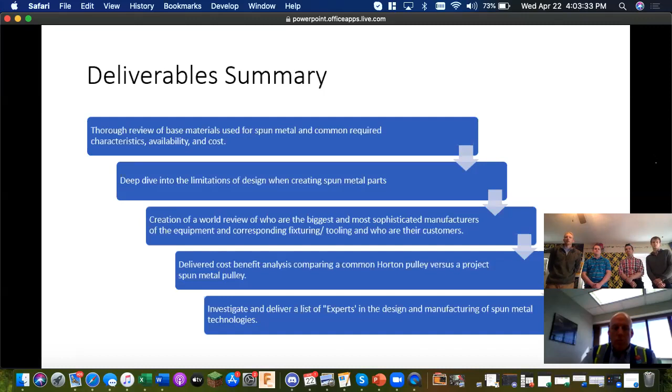Okay, and an introduction to Horton. Horton Incorporated is an American company. They're a major truck OEM. OEMs are original equipment manufacturers, so they create components which other companies can purchase to put into larger systems and then into their own practices. Some of their on and off highway customers include John Deere, Daimler, Volvo Mack, Peterbilt, Caterpillar, and Komatsu - big, large trucking industries.

All right, so now we'll take a look into how this is incorporated into Horton, what products they manufacture, how this project ties into that, and some of the work that Horton has done in the past. So the parts that Horton makes that go on these OEM trucks and agricultural equipment are the fan systems, the clutch drive systems, and pulley systems that go on the front of the engines to help in the cooling of this large equipment.

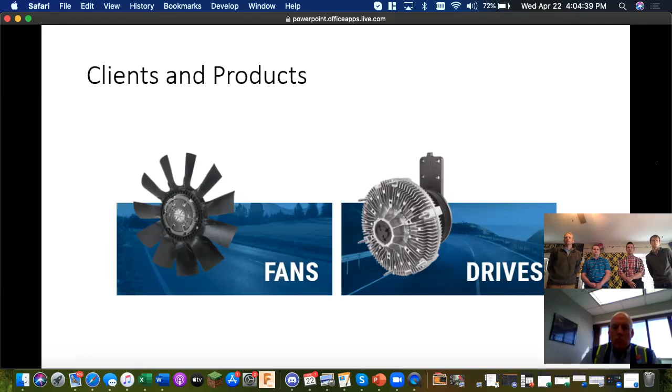Now the cooling system is made up of a variety of different components. You have radiators, you have fans, you have all the coolant, there's water pumps, heat exchangers, all the stuff that goes in for keeping the engines in proper operating temperatures.

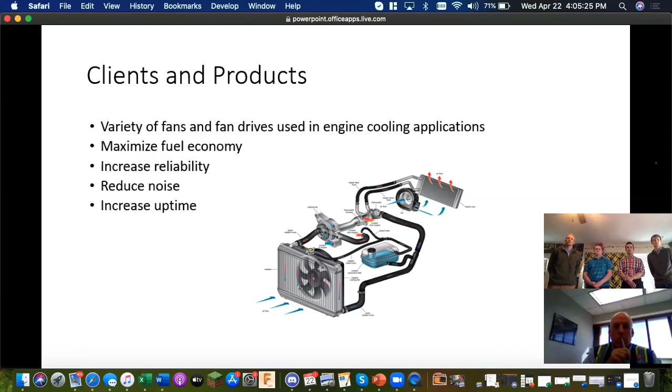Now these components are all driven off of a belt drive that goes on the front of the engine. The cooling system turns on and off with the clutch drive so that the engine can stay at proper operating temperatures, so you can achieve proper fuel economy. This is all done to increase the reliability of the equipment and the tooling.

Now, that pulley is one of several pieces that go on the front drive end of an engine. Some go to the water pump, some go to cooling fans, some go to alternators and other pieces for the equipment.

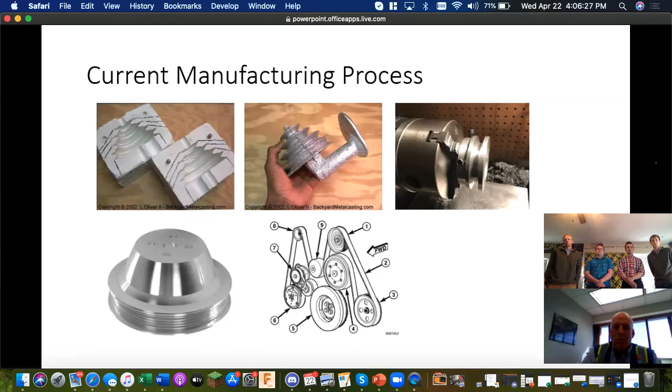The proposed process that we'll be looking at is the spun metal process. This differs from a cast process in that all your material comes in sheets or coils. These coils are unrolled and then stamped, or potentially laser cut or sheared, into circular blanks. These circular blanks are then spun or drawn over a mandrel or buck into the desired shape.

The process can also take on annealing steps that help soften and take some of the strain out of the part prior to final rotational forming, which puts things like the grooves in for the serpentine belt that drives all the fans. Finally, you can have heat treating processes which help achieve desirable hardnesses.

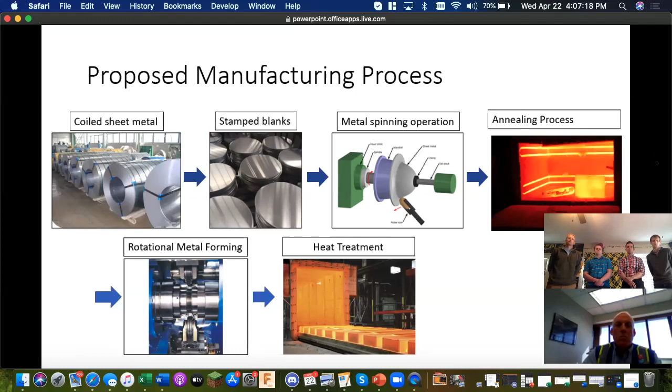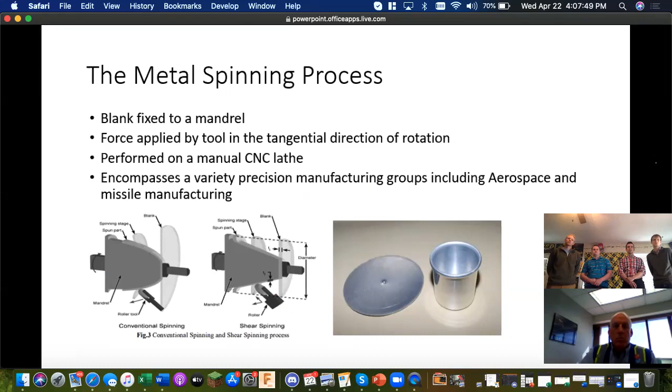The metal spinning process is fixtured on a buck or a mandrel, in the shape of the part that you'd like to achieve. On this mandrel, you put a circular disc of your material, and that is spun and forced over it with a CNC or by an operator, using rollers or shoes to push the material into shape, slowly forming it into the final product.

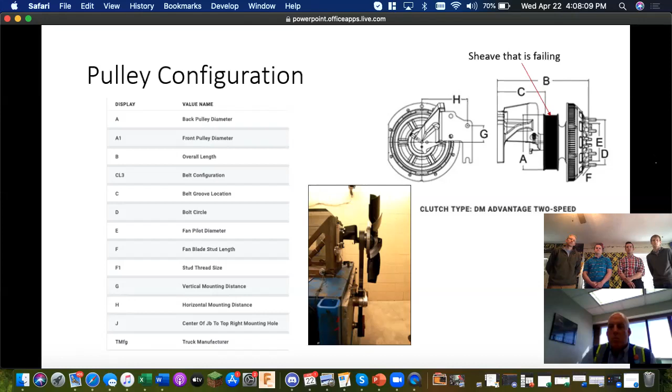In the past, Horton has done several CAD designs and different modeling to try to predict where failures and stresses would appear in their final product.

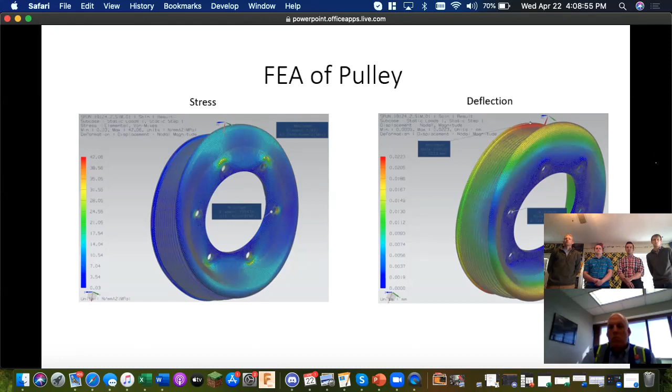You can see the very outer lip of the pulley, furthest away from the mounting surface, has the maximum deformation, and that's caused by all the force of the front drive system.

This is a video that Horton has taken in the past for one of the processes when they're making prototype spun metal parts.

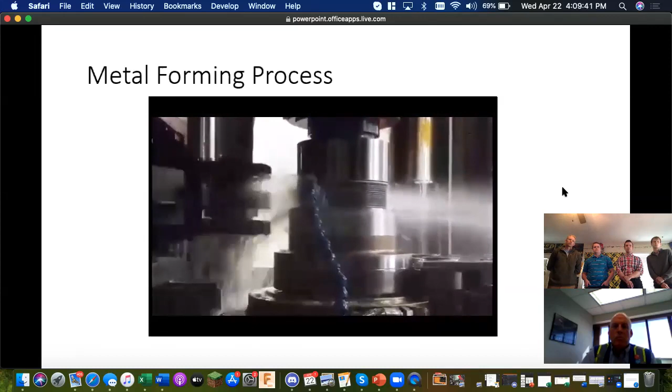Through testing they saw complete failure of these parts between 80,000 miles and 170,000 miles, which may sound like a lot, but in general it's pretty low for the amount of miles that some of this equipment may see, which may be up to millions of miles of road use.

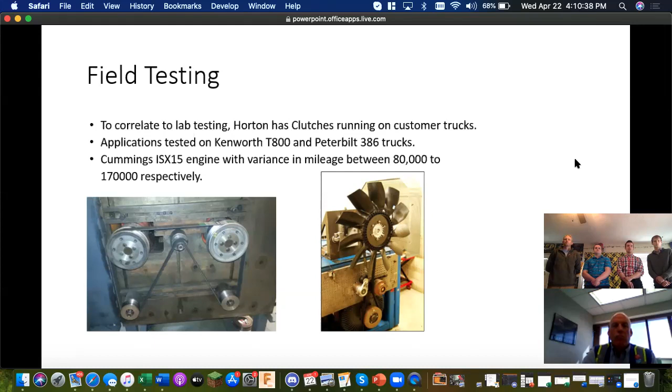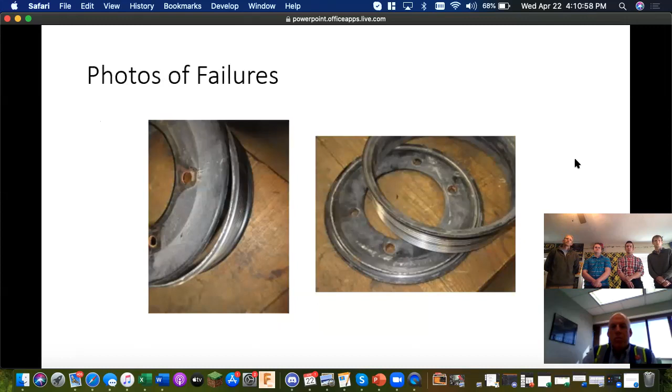Here is a final photo showing where that failure point occurred. We can see that it was on that bent lip where our highest stress concentrations showed up in the FEA design. So it's good to see that our modeling and final results have correlations, but it's bad to see that our part is actually failing prematurely.

Next we're going to do a deep dive into Deliverable 1, which is a review of the materials. On the next 3 slides we have some technical information about 3 common types of steel that we think would work very well for Horton's application, both in the pulley and in the spun metal process.

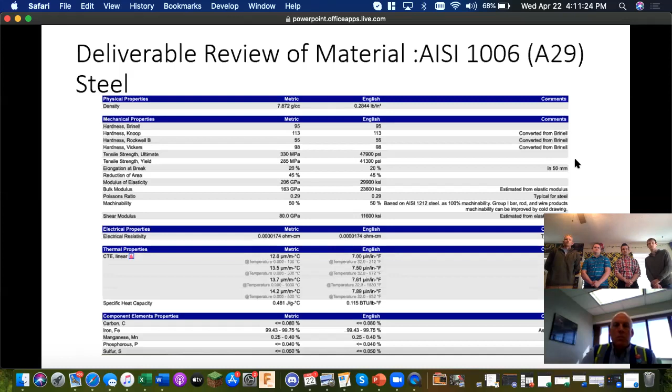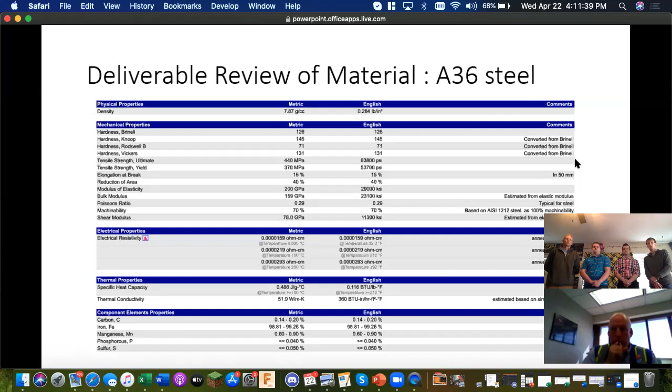Some other information about materials: stainless steel is also a viable option for metal spinning, but it is 4 times the price. We don't think the benefits of stainless steel will negate the 4 times price increase in the material. If you are going to use stainless steel though, 3000 series is the best for metal spinning.

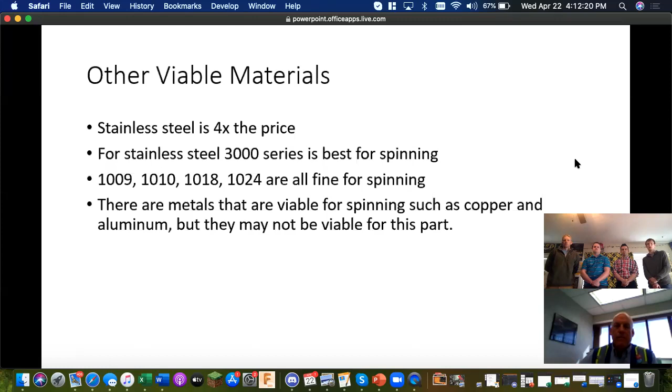Some other types of regular steel that will work great for spinning are 1009, 1010, 1018, and 1024. There are other possible options for metal spinning, such as copper and aluminum, but these metals will not be strong enough to withstand the stresses put on the pulley.

There are other shape guidelines that will be put in the report. These are just the 3 that are most applicable to the pulley itself.

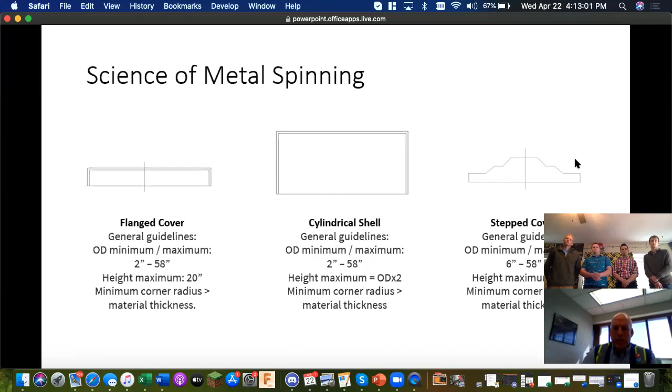Some other information about metal spinning: the maximum size of sheet that can be spun is 92-inch diameter, because that's the biggest sheet that can be ordered without welding. You never want to spin a welded part. Metal spinning is a very safe manufacturing process, but if you start spinning welded parts, that's where you can run into dangerous situations.

As a guideline for strength, the material should only be stretched as deep as it is round. Too much draw depth can severely weaken the final product. Aluminum can be stretched basically as far as you want without problems, as long as it stays above a minimum thickness. For steel, the thickest ACME has ever spun is 1 1/4 inches, but they believe they can do up to 1.5 inches without a whole lot of problems.

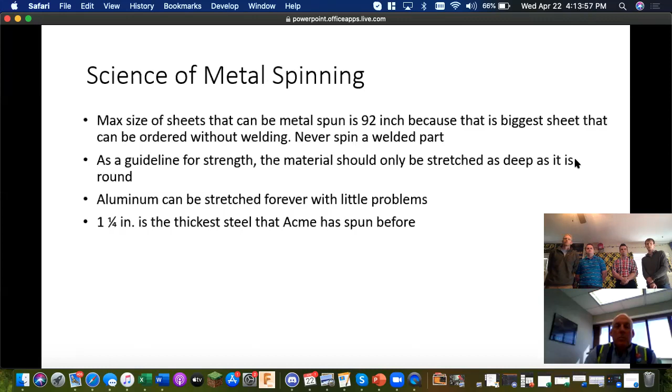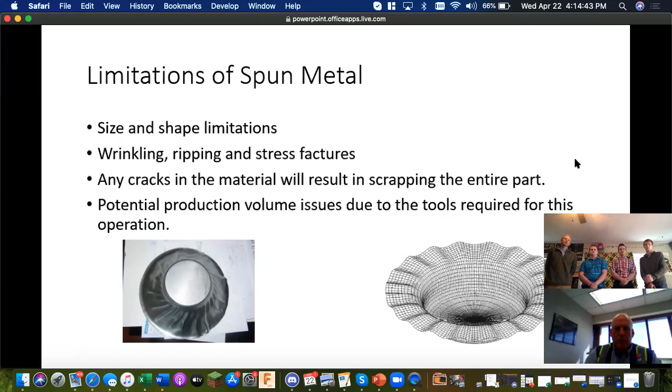So some limitations of spun metal: we had some shape limitations from a few slides ago. Besides that, during the metal spinning process, if the material gets too thin or if you use the rollers too fast, you can have serious issues such as wrinkling, ripping, and stress fractures. Any of these failures will cause an instant scrap of the part. It's impossible to save a part that has any cracking in it without melting it down and starting from scratch. So you can have potential production volume issues, balancing going in too fast compared to getting parts that'll work strength-wise.

For quoting metal spinning, companies will quote a design based on perimeter and a draw depth of the piece provided. As a general guideline, the equation for the sheave we were presented is diameter times 1.5 times the draw depth. The blank cost is calculated based on the weight of the piece. It's impossible to get an actual price because metal prices fluctuate so much, so it's just based on the estimate at the time you want to make the part.

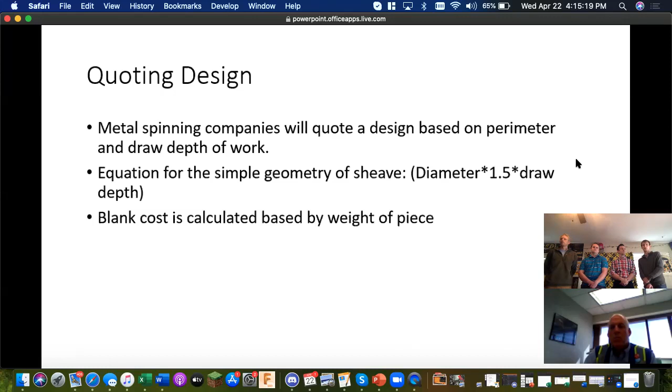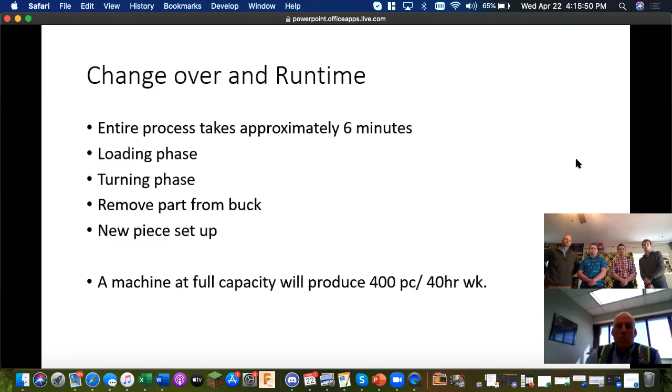For the changeover and runtime in setting up the process, the entire process will take about 6 minutes for this specific part. That includes the loading phase, the turning phase, removing the part from the buck, and new piece setup. A machine at full capacity will produce about 400 parts per 40-hour work week. That can be adjusted, but this is set at a pace we think will have minimal problems with wrinkling and stress fractures.

Another process previously mentioned is annealing and heat treating. The benefits of annealing are that it softens the metal for cold working and prevents hardening and stress fractures, which improves machinability. It also enhances electrical conductivity, but in our case it seems very important due to the stress fracture breaks the first time Horton tried to make a spun metal pulley.

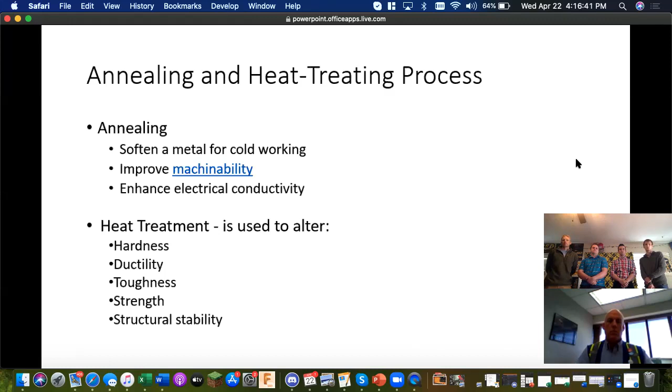So we would highly recommend annealing during the process. When the whole process is over, you can heat treat it to increase the hardness, lower the ductility, increase the toughness and strength, which will overall just increase the structural stability and longevity of the part.

So pass it on to Cory. During our time doing research for this project, we decided to tour ACME metal spinning to get a view of what these machine shops actually look like.

So this slide, we're going to talk about what we observed while we were doing research at ACME. Right when we got in there, we went onto the floor and got to take a look at their entire process. They had multiple machines running, and we were able to be out there without any hearing protection. It was so quiet that we were able to have full conversations, which is a benefit of metal spinning for communication between employees.

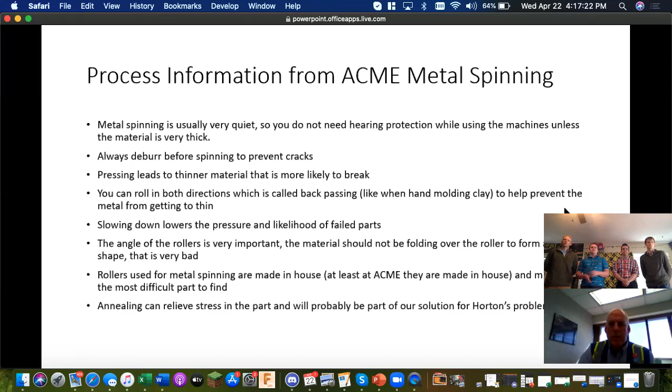A few of the things they recommended was always deburring metal before you spin it, to help prevent cracks. One thing they said when they looked at the video from Horton was that the pressing they do is really quick and aggressive, and that is likely what's leading to the break in the part.

They also recommended rolling machines in both directions, or rolling the material in both directions. What I mean by that is like a pottery wheel, where you move the material back and forth to help distribute it more in the metal so you're not getting as much thin and thick difference in the material. Slowing down and lowering the pressure on the presses would also likely help not fail the part we're working on.

Another part of the machining is a roller. The roller is the tool that pushes the metal across. The rollers are one of the more difficult parts of this.

They're hard to find. You have to build a lot of them on your own. That requires somebody knowledgeable in metal spinning, who has been practicing it for years. The angle of the roller is the biggest issue because as you push the metal across, it can come up over the roller and that will lead to a stress fracture or wrinkling, and now you have to scrap your part.

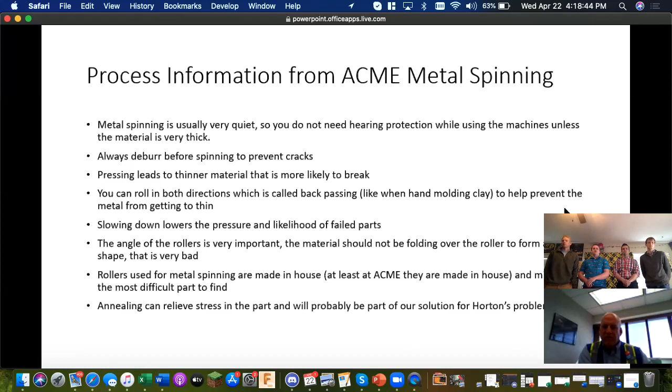So this is one of the biggest issues and hardest parts of metal spinning: the rollers. And like mentioned before, annealing is something they recommended for removing stress in the part. One of our deliverables was to talk about machines that we found in our research for the metal spinning process.

We have 3 companies that we recommend. On this slide, we're going to talk about the different types of machines they have. There are single and double rollers. The single roller pushes on one side of the part as it spins around to move the material across the buck. The double roller has 2 rollers, one in front and one just a little behind it, for moving the material across. This puts more distribution in the stresses you're applying to the part and helps your process times quite a bit.

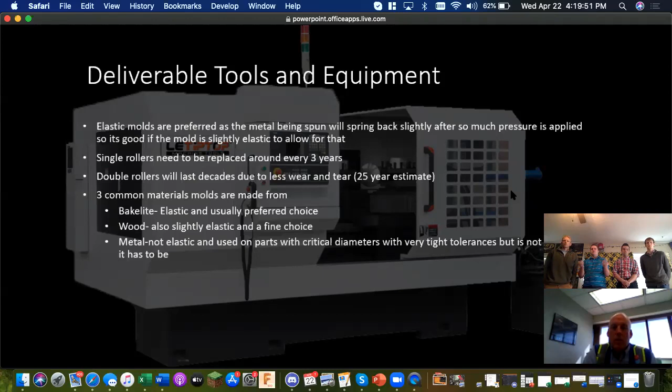One thing they talked about with the bucks was making them out of elastic material, because as you press the metal down onto the buck, it likes to spring back when you move the roller back across. So you want an elastic buck, to a point—not super weak, but something like wood works very well. As you press in, you're also pressing into the buck, and when you release, it springs back to the size you're desiring.

One of the machine companies we looked at is LeTipTop. They're based out of China. They are a CNC spun metal machine manufacturing company. They produce both single and double rollers. Below are some stats about their company. Here is a video of one of their machines.

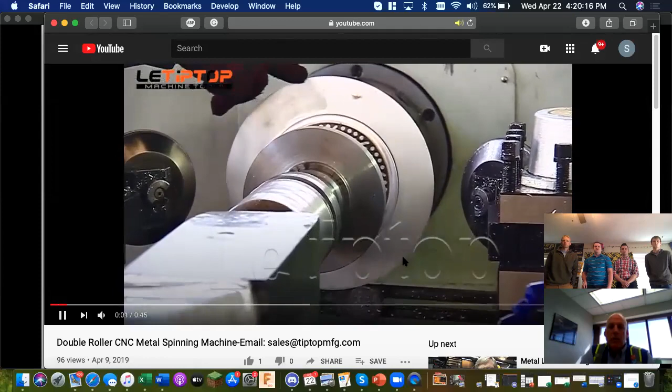In this video, you can see them place the metal onto the rollers, and as they push it across the buck, this is a double rolling machine. They have one roller on one side and one on the other, applying even pressure on both sides. One roller is right in front of the other, so you're able to do 2 spinning operations at once as you move the metal across the buck.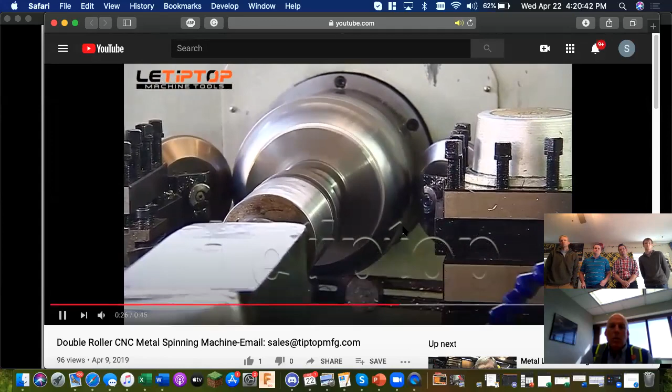Very quick, very efficient, and very quiet as well.

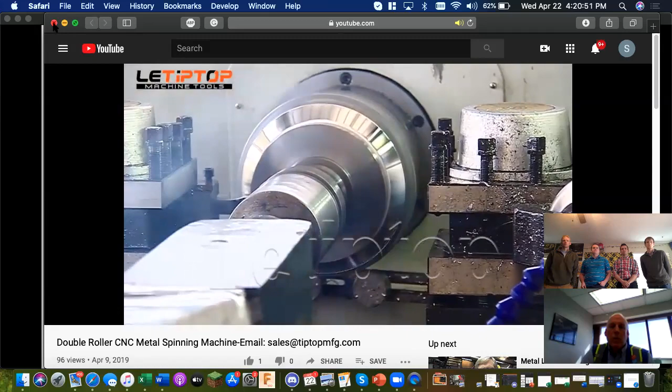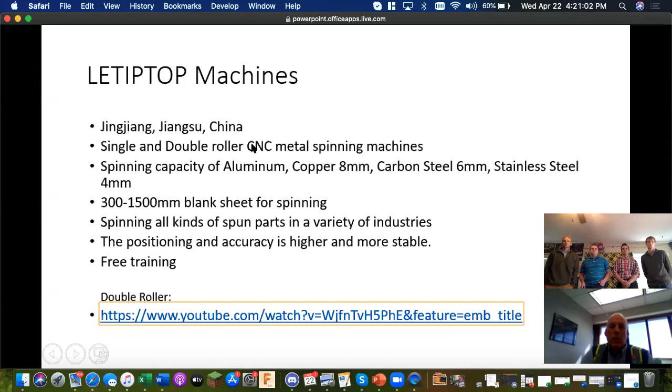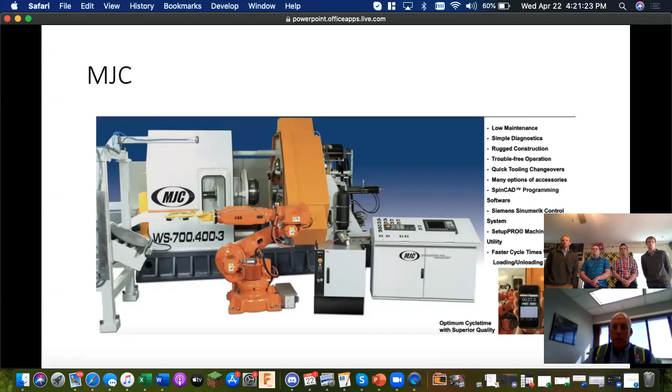A couple other manufacturers we ran into: this one is one that ACME recommended to us, that they've heard about. It's based out of California. It's called MJC. They are a little bit higher end, a little more expensive. A lot of their machine kits come with both single and double rollers available, and they have a lot of robotic arms that function with their machines for more automated processes.

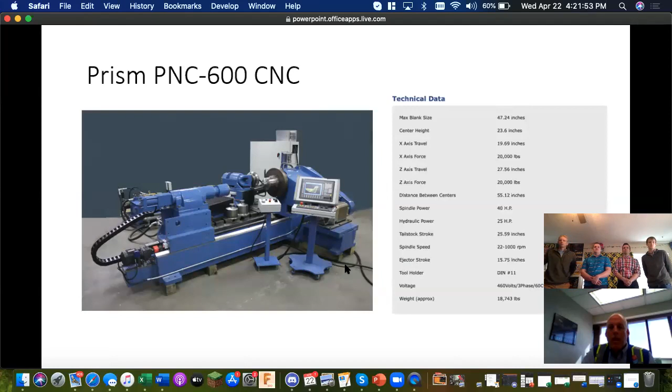The ones we got to see in action when we were at ACME were the Prism machines. They're based out of Canada. They're quite a bit more cost effective, and very applicable for the design we're looking into right now. This is the machine we're recommending later in our presentation. Along the side, you see all the stats for this particular machine, and most of them we saw in action were single roller.

Now I'll be discussing the fourth deliverable, which is the cost benefit analysis. First we'll discuss Horton's current process. As they stand, Horton produces a single pulley for about $35.67 per unit at a production rate of 10 parts per hour. When we discussed with Horton, they believed they could go off a 7-year return on investment for their project goals, and they would like a new production rate of around 3,500 parts per week.

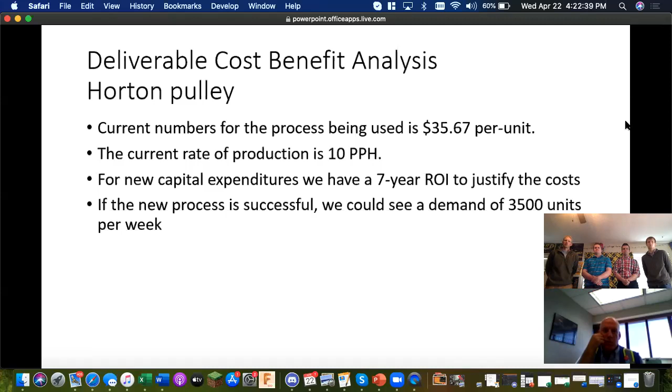Here's a spreadsheet of some of the most important factors we determined for our cost benefit analysis.

On the far left column, we can talk about the Prism machine, from the company out of Canada. They create maybe not the cheapest, but the most cost-effective machine for what we would need. This covers the machine setup, the part setup, the machine capability, machine specialist, how much it would cost to employ a specialist, the type of material, and the annealing and heat treating processes. For each of these different criteria, we went off a single time, single week, single year, or single batch/load.

So for the cost of a Prism machine, this is a macro level, so this is very average. It's about $400,000 per machine.

To set up a machine, the company we've been working with, ACME, gave us a quote that there's a 2-hour minimum fee for installation. That means when you need to change out the buck or whatever specific production criteria there is for each new part, it'll take about 2 hours. We came up with a total of about $62 for that, based on how much it would cost to pay a machine specialist, since he would probably be the one to perform that.

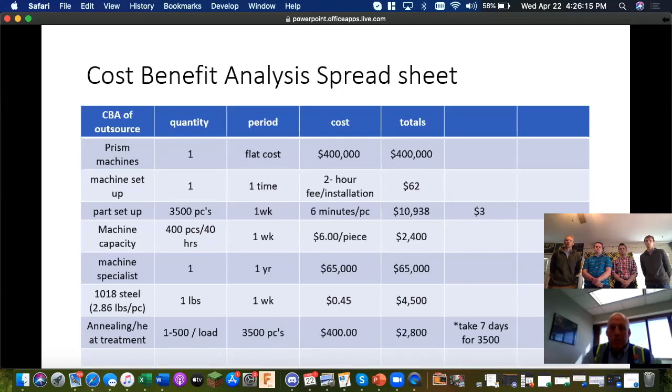Next, we'll go over a qualitative analysis. We judged the pros and cons of Horton continuing to do their spun metal process in-house versus what it would take to outsource it. We did this as a group.

We came up with the pros of Horton continuing to do their process in-house: lower cost per part, no shipping cost, and they'd be able to directly oversee quality. There wouldn't need to be as much communication, at least over the phone, since engineers could just go down to the shop floor if there's an issue. They wouldn't be able to see that if they outsource things, they'd have to communicate with somebody else, which is more difficult.

More parts would be able to be produced than the current process, and there'd be less scrap with the spun metal technology in general. Some pros of outsourcing this: there would be professionals working on the parts constantly, and they're most likely going to be leaders in the spun metal industry.

We have an asterisk by this, but we believe it would be less expensive in general to outsource, because you wouldn't have to hire a new employee and train them, and there wouldn't have to be downtime of moving machines around your facility.

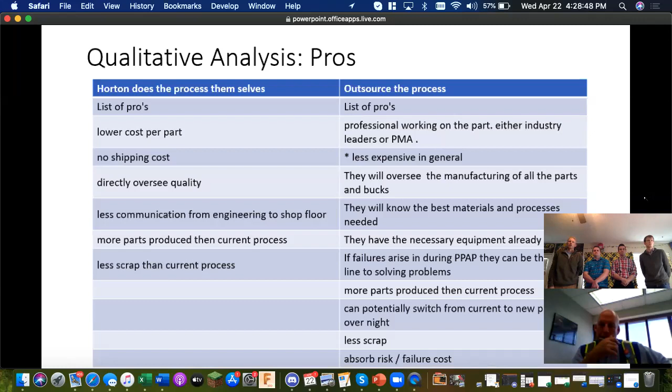Some other similar pros as Horton producing it in-house would be there's less scrap. And a pro for Horton at least would be that if an outsourced company takes on this project, they would absorb the risk and the failure cost if they were to not produce weekly goals.

And here are some cons. If Horton produces the part in-house, they would potentially need to purchase multiple expensive machines to meet their demand. There would be an extensive learning curve—they'd have to teach all the newly hired employees how to spin metal and about spun metal technologies in general. They would need to either train skilled operators or hire new operators. Spun metal technology is also very difficult because it's very trial-and-error based.

We showed you several videos of the spinning technology, one from an actual metal spinning process and then one from Horton forming their metal. We did get information that the video from Horton shows them spinning it just too fast.

They haven't probably performed any of the trial and error based processes, so that's why we believe it is failing. There would be downtime for installation. It'd be potentially difficult and expensive to produce the rollers, and lots of crossover time. The last one is all CNC operators may need to be repurposed, because that's what the majority of the operators are in their facility currently. They may have to go back to school, and there may be possible layoffs, so it could be very expensive for Horton to do this.

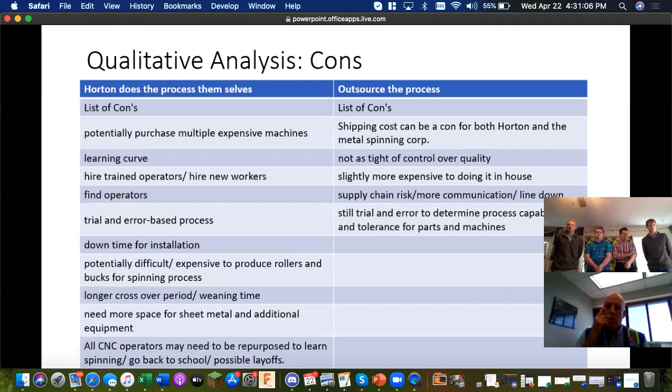For our fifth deliverable, we needed to find a list of experts who know about metal spinning already and who could be potential customers or suppliers to Horton. Here's a list of 3 professional metal spinning companies that we had found in Minnesota.

One is C&W Spinning Incorporated, located in Maple Lake, Minnesota. Glenn Metalcraft is in Princeton, Minnesota, and Acme Metal Spinning is in Columbia Heights. Acme is the one that we actually went and visited.

It was kind of tough. We actually had meetings scheduled to meet with all three of these companies, but due to coronavirus, we were only able to meet with one, which is unfortunate.

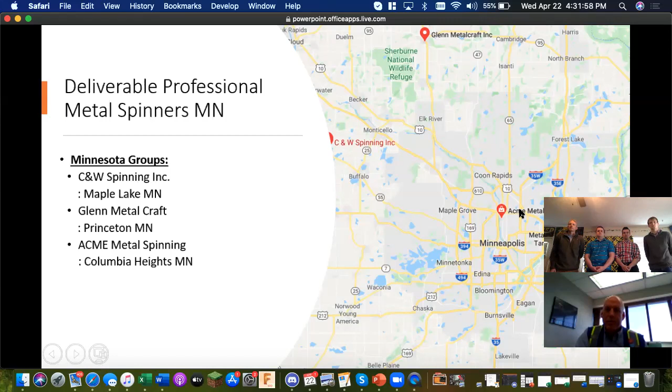Here's another list. We also discovered a list of professional metal forming experts. It's called the PMA. Everybody in this association is 9001 certified, so they kind of meet Horton's criteria of who they would like to supply their products. These three companies are located in the United States, so we just need to communicate with these companies to fulfill work.

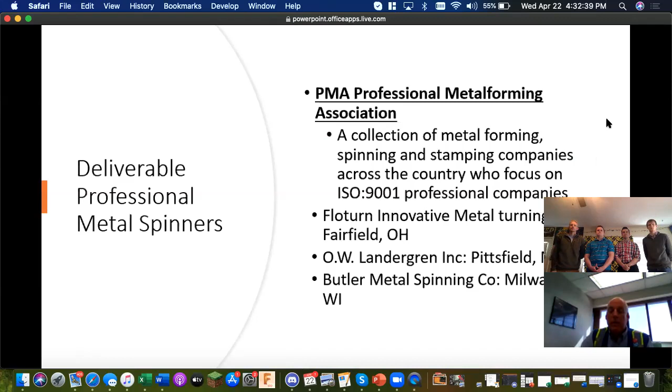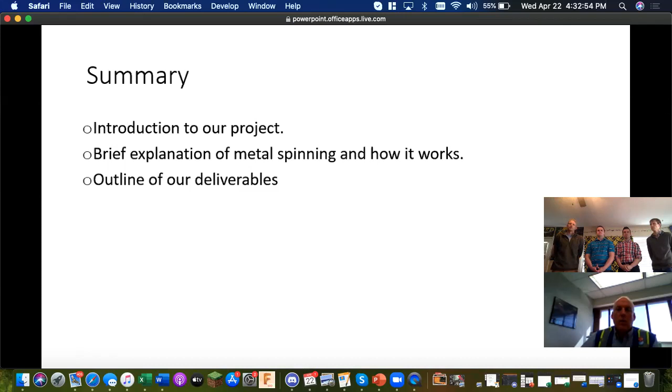And we can do a summary. We introduced our project, had a brief explanation of the metal spinning technology in general and how it worked, and then we went over our deliverables, discussing each one of these in depth.

Any questions? So I guess the biggest question I have is the whole purpose for Horton to do this. Was it quality? Was it cost? Was it both? What was their primary reason for looking at this spun metal?

I know it wasn't working. They tried it before, and it didn't work very well. But is it truly cost effective, or is it just the quality that's so much better?

The main reason for this was they had a projected cost, and they have a higher demand going into the future. Right now, they have dozens of CNC machining operations in-house, and they're only able to produce 10 parts an hour, whereas with the spun metal process, one machine is able to produce the same amount as their entire factory. So if Horton switched over to a spun metal process, they could potentially meet that future demand and do it at a much cheaper cost.

Yeah, what's the quality difference between the spun metal and the way they do it now? Is there really no difference? That's the hope, that they'd be able to achieve a spun metal part that meets that same quality. Right now, with the testing they've done in the past, they've seen spun metal not quite meet that level of expertise that they need. But by going with an expert, or doing further testing and processing, once the two processes have the same level of quality, that's a product they could stand behind.